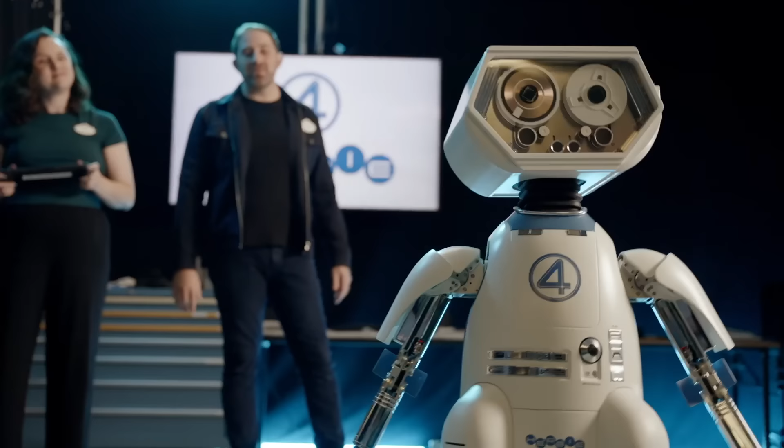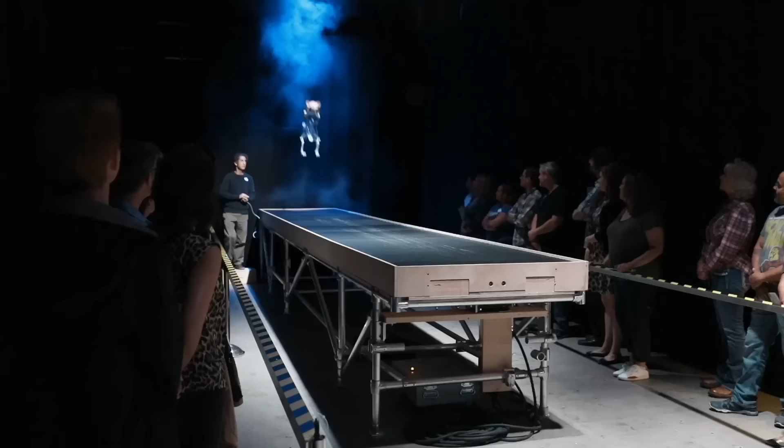In this episode, we're introducing you to a special group in Imagineering, Disney Research. They represent the very beginning of our development process when sparks of imagination begin turning into reality. You'll learn how Imagineers in research and development blend creativity with technology to envision the Disney experiences of tomorrow. You'll also hear how we're collaborating with the world's leading tech companies to push our storytelling in all sorts of innovative new directions. And of course, we'll have a few surprises for you along the way. We call it Imagineering.

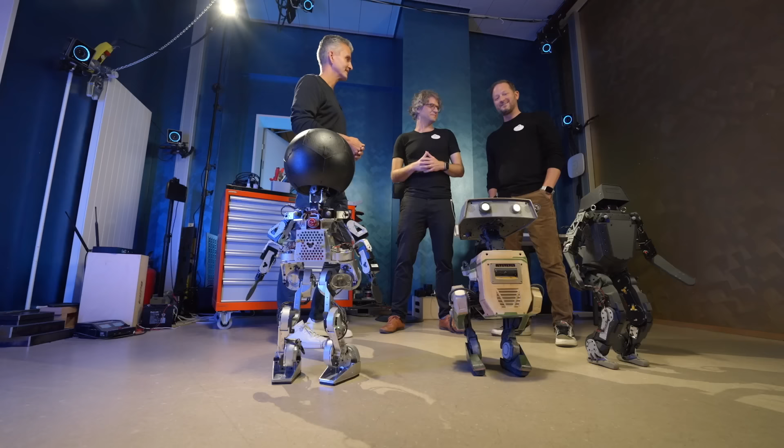Kyle, it's great to be here at the research lab in Switzerland. I've seen so many incredible things. Why are we here? Why in Zurich? Disney's a leader when it comes to entertainment robots. We've got this rich legacy, starting with Lucky the Dinosaur, all the way to Spider-Man and Stuntronics, our BDX Droids.

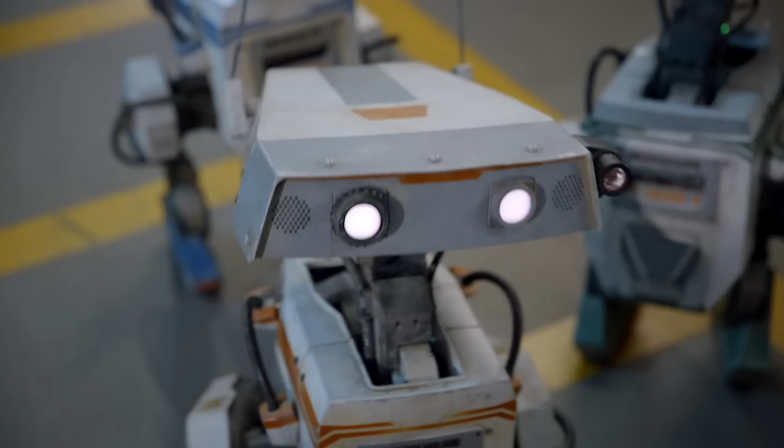Switzerland has become a hub for robotics and AI. At the center of this all is the Swiss Federal Institute of Technology, or ETH Zurich. We partner with ETH, including a shared PhD program. They cover all disciplines from hardware to smart software. This team here is a leader in creating the next generation of robots.

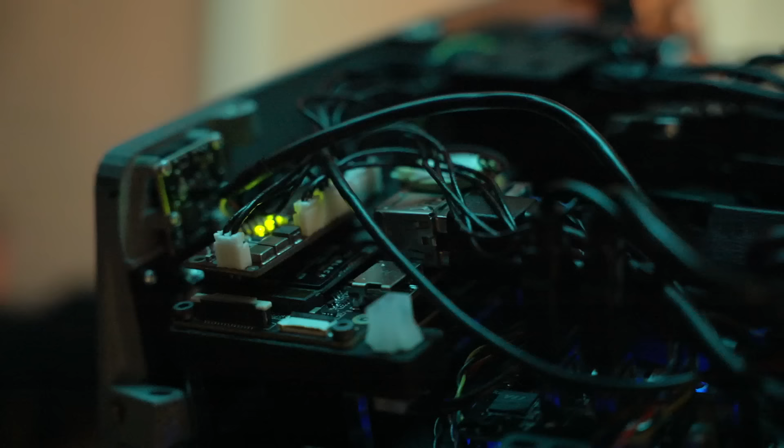We have one unified goal, building artist-centric technology to tell new stories with characters like these ones that we see here and bring them really to life so that they emote and interact with our guests. And it's incredible how far this has all come. It's pretty amazing what's happened in a short amount of time. We got a big surprise for you, Josh. Okay.

Hi, everyone. I'm Olaf. Hey, Olaf. And you are... I'm Josh, Olaf. So good to see you. You look amazing.

Olaf is one of our most popular characters. Absolutely. He shows up in parades, in live entertainment shows, as well as in character meet and greets. So the demand to bring him to our parks is off the charts. We're excited to announce Olaf will be available in both of our Frozen worlds in Hong Kong and Paris early next year.

I can't even imagine this. Like seeing people meet Olaf for the first time in his form. I think this is going to be just incredible. A really, really inspiring day. Hands down, this is the best day of my life.

Hi, Natasha. Welcome to World of Frozen. Hi, Michelle. I am so excited to be here. I'm super excited too. It's so wonderful to see World of Frozen come to life and coming to life in a whole new way. We will have, for the first time in forever, a self-walking Olaf. It's incredible. We're going to have next generation robotics characters, and this is the latest cutting edge technology.

We're here in Glendale, California, at the headquarters for Walt Disney Imagineering in the R&D facility. Yes. We have this huge legacy of building and bringing our characters to life through the latest in technology. I like to think of R&D as the wizard shop inside the wizard shop.

Not only do we have the incredible innovation which happens across the broader Imagineering group, but we actually have dedicated experts. They're really creative technologists here within R&D, fusing together both art and science to bring experiences to life. We've been able to bring that group of people together under one roof to solve some of our biggest challenges.

When you really go back in time, Walt created WED Enterprises to build Disneyland. He didn't have an R&D group. It was a smaller, more nimble thing, but there were specific projects that needed an extra amount of invention. And so he did have to collect people, and I think of Audio-Animatronics as one of those big ones, but also the illusions and things like in the Haunted Mansion. These were really pushing the edge of technology.

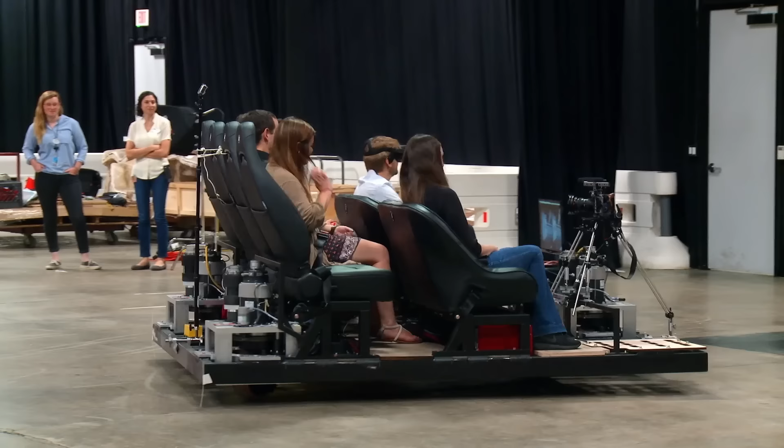When you think about what R&D is today, it really is an extension of the original Imagineers who Walt tasked with innovative ride systems, with Audio-Animatronic figures, things that could allow the guests to step into incredible worlds in ways that couldn't be done if you just had to have actors and other things like this.

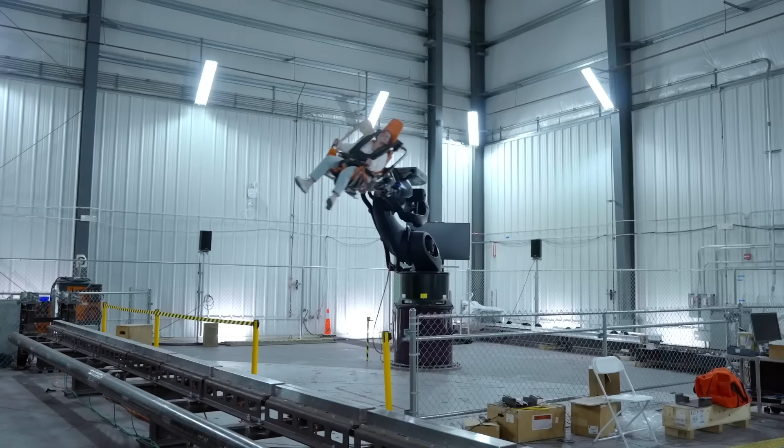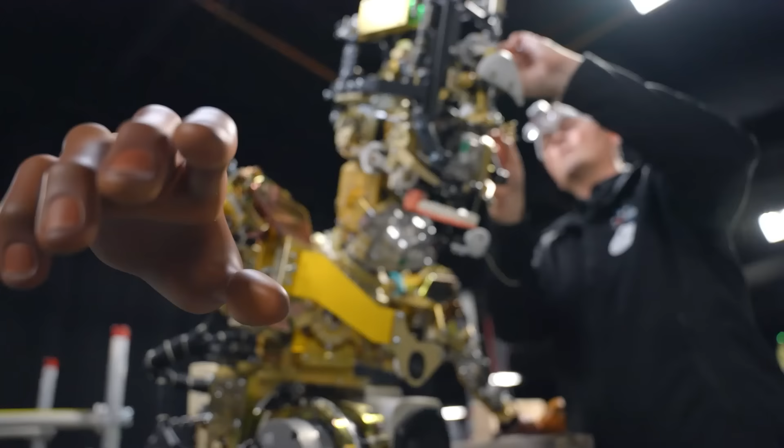And when I joined in 1993, R&D was a top secret facility. Actually, we didn't want anybody to know that we had this innovation going on because it was really the technology behind the magic. Over time, though, we've loosened that up and actually do shows like this where we expose it because it's become more and more important for the company to be seen as the innovative and technology-driven company that it is.

The diversity of the work that we get to put some of these talented people against, it's kind of fun doing the impossible, and that's what the challenge is every day. Everyone has their own unique approach trying to get that done, and that's what's great about the job is that it's different almost every single day.

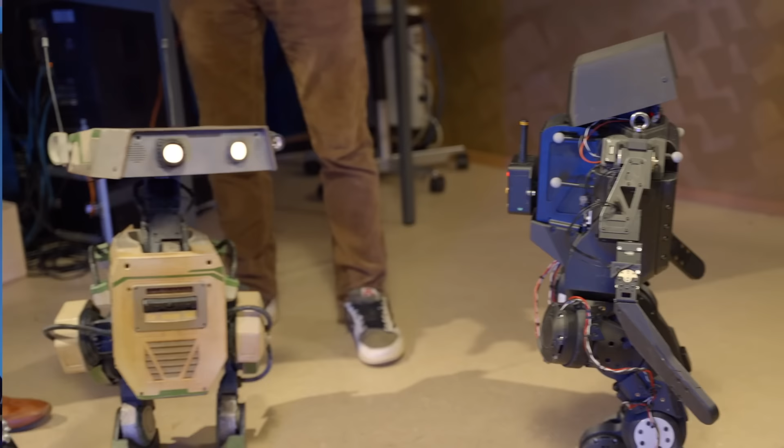We've got some robots, some droids in front of us. We started from very basic structures with a huge ambition, ultimately, to get that state you're talking about, and now here they are. Talk to us about the progression. Yeah, we actually started with this humanoid test character. Can we get 2 legs to do stylized walking? We have characters that express emotion through motion. So stylization is important, artistic interfaces are important, and we embrace reinforcement learning as a technology very early on.

Reinforcement learning is the way we learn actually as humans. That's an algorithm that brings this capability to a computer. And so we train them to imitate artist-provided motion. They learn to balance at the same time. Do they actually learn? They do learn and imitate basically how we humans learn. And over time, really polished motions.

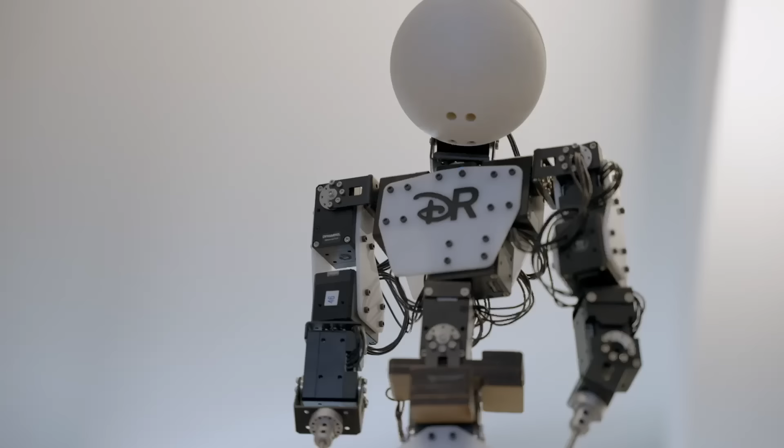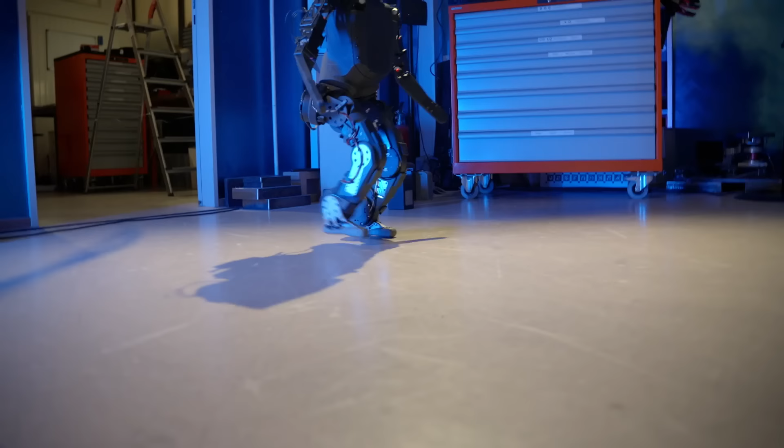One of the things I think is really interesting is the use of machine learning and AI in order to develop the robotics. Reinforcement learning is a branch of artificial intelligence, which allows us to take animated figures, bring them into simulation, and then teach them how to walk as if they were a young baby. We can do 10,000 hours worth of training in days. It used to take us years to develop robots. Now, using reinforcement learning, we're able to bring those robots to life in mere months.

Espen, do you remember how I challenged you to create actually a first walking character with 3D printed parts and off-the-shelf actuators? So you said, can we build a walking robot? And I said, well, I think it'll work, but I don't know. And you said, well, let's do it anyway. If we can use 3D printing, we can build something really fast. Can we make that work?

Key idea was, instead of trying to build a perfect, idealized system, let's build an imperfect system and instead try and understand it really well in software. We first took a single actuator and we put it on a test stand and we tried to understand how this thing behaved and moved. Now, when we put it together, we tried it and the RL walking worked first time. Yeah. Never happens. It's a solid foundation that we've then been able to really build on.

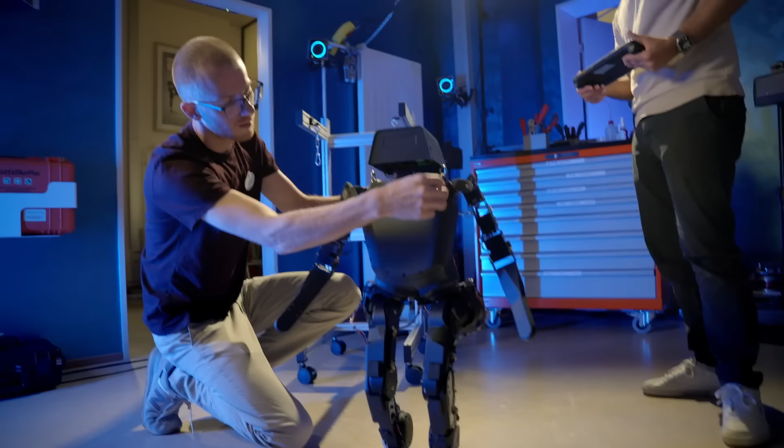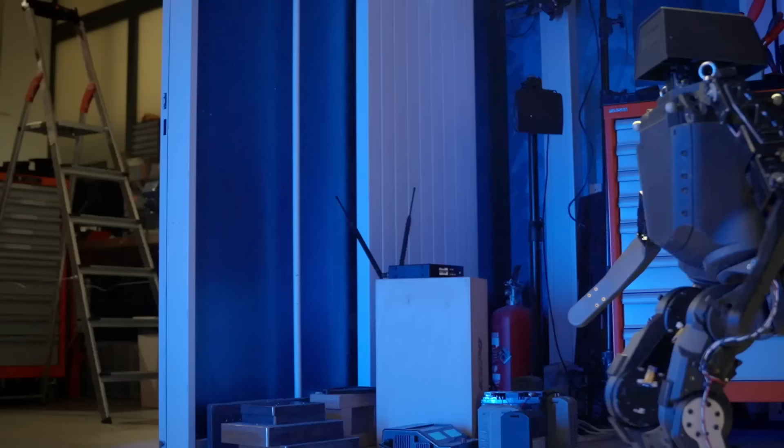So this guy doesn't look anything like a BDX droid, but if you really look under the hood and look at what makes this work, it's all building on the same technology, and so this is really what enabled us to then go and build the BDX droids. We know how humans walk, and so the goal was then, how can we bring this human motion to our robots to make them feel lifelike, and we want to have those robots also perform other motions. So our goal was not to have the robot learn only a single motion from an animator, but be able to perform any motion that an animator asks the robot to do.

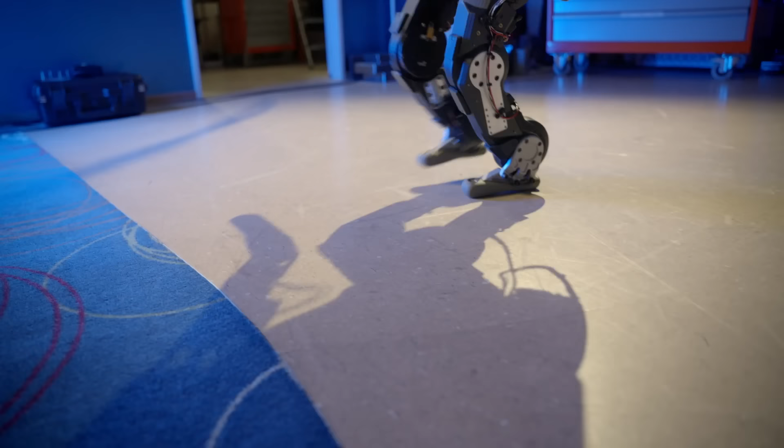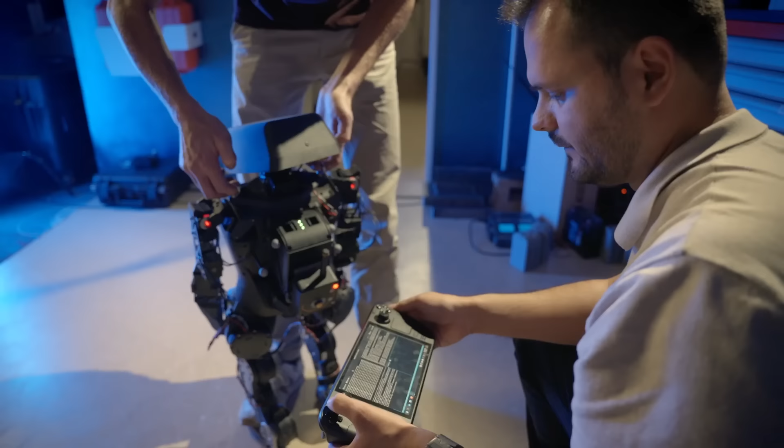From the human motion, we first have to retarget them to the morphology that we have here. This character is a bit smaller and you get a lot of imperfection, but then in reinforcement learning, it still is able to learn from this imperfect data, and it extracts basically the knowledge of how does a motion evolve over time and how can I track such a motion. And so it's the same concept again. RL, reinforcement learning, learns in simulation to imitate those motions many, many times. Over time, the robots become better in doing exactly those motions that we ask them to do.

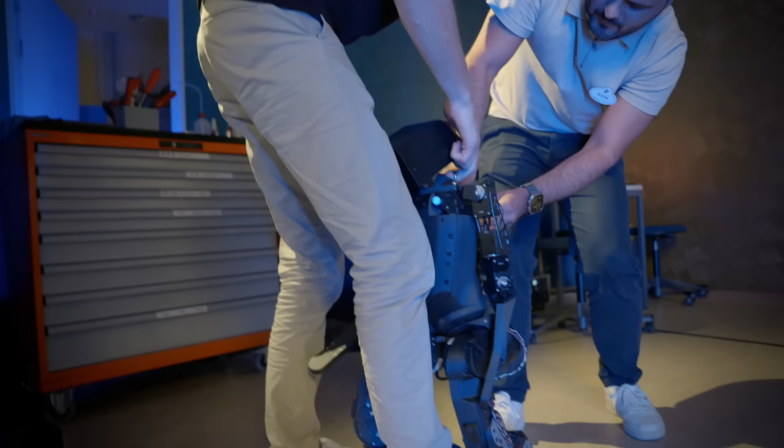Getting something to work in simulation is one thing. Getting it to work on robot hardware is a different challenge. The physical world, the real world is unforgiving. The robot will break if it falls too many times. Because we took the time to understand how the actuators move, to tune the models, that means that you can really start pushing those motions to the limit.

And then we got it to moonwalk. One motion that is very challenging is something like a moonwalk. You slip over the floor, basically, and move backwards while pretending to move forward.

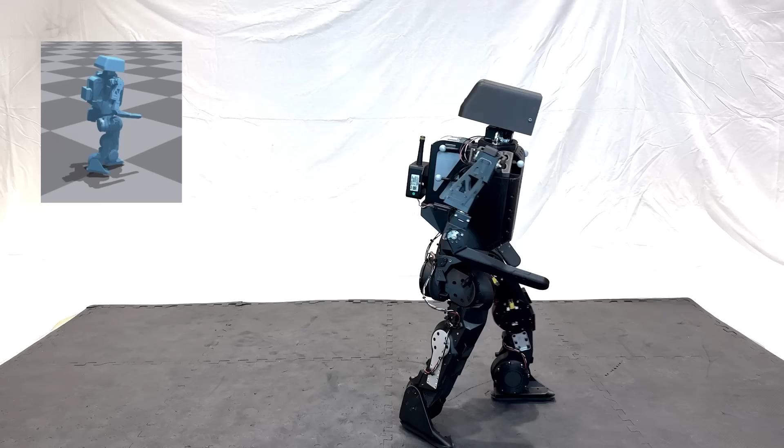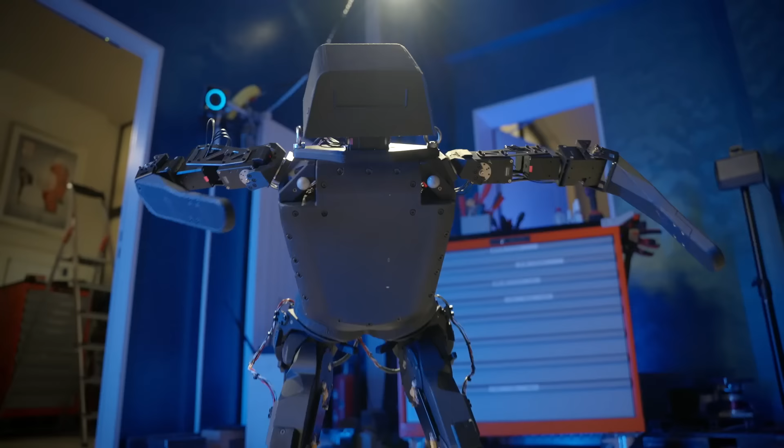We used human examples of a moonwalk and then trained a policy that can actually do the same on the robot. You create artistically a target motion and you can stream that to the robot and it dynamically balances afterwards. That's amazing for taking the next steps. We made great progress in this direction, but there's much more that we can explore and dream of.

First of all, thank you for having me at NVIDIA. Welcome to the second happiest place on earth. It feels that way. I think our collaboration is essential. We're in love with working with Disney.

The work that we work on together covers computer graphics, artificial intelligence, robotics, and the fusion of all of that. Disney has been at the forefront of some of the most cool technology invented. But at the core, the reason why we love the work is just the way you push the technology is incredible. A lot of great technology started in entertainment. Yeah. The best technology in the world has always been core to enabling Disney to bring the characters to life and immersing our guests in incredible experiences. You know, at the core, Disney is a technology company.

The joy is so incredible that we forget about the technology, and that's exactly the point. We had an expression, the technology behind the magic, because at the end of the day, we want people to believe Olaf's alive. It's not very cool for us to brag about our tech. There are certain characters, like the BDX Droids, where you can't put a human in a costume. They have to be in this mechanical form, and yet they can still be imbued with life.

My dream, and it will be a reality, is that it's a seamless experience for our guests. If they love us and they experience us in the gaming world, they can bring that with them to the physical world. That's right. They'll experience it when they see the films and streaming, and then what they do in our parks can also be referred back to. A lot of the work that you do inspires whole generations of engineers. You know, what Imagineering is about to put out. In fact, that's always the thing we look for.

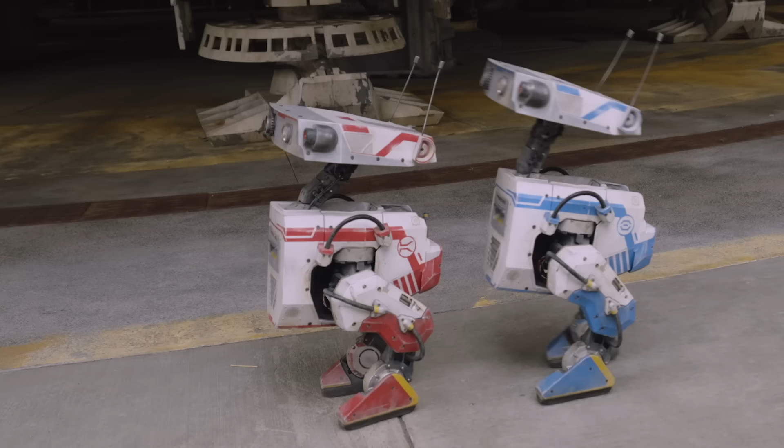There is a tremendous amount of talent out there focused on very specific problems, like NVIDIA, where they are building some of the most revolutionary computer chips that are going into our robots. And what that then allows us to focus on is that emotion, that connection that we are making with our guests. We're taking motor encoder data from the BDX joints and then playing it back so that they can get an authentic droid-like sound. We couldn't focus on that if we were having to build our own silicon and our own chips in order to bring those robots to life. So NVIDIA has been a great partner to help us do that work on the physical products, but also in simulation.

We're really excited to upgrade the Millennium Falcon with an all-new mission to bring to life the characters, the Mandalorian and Grogu. There are a couple technical dimensions that really help our guests get lost in the story. Every single cockpit is driven by graphics cards, all working in parallel. All of that media is being rendered in real time, giving us flexibility for future upgrades. We have access to the most amazing engineering teams, as well as graphics drivers, to make sure that we're delivering high-quality media to truly transport our guests to that galaxy far, far away.

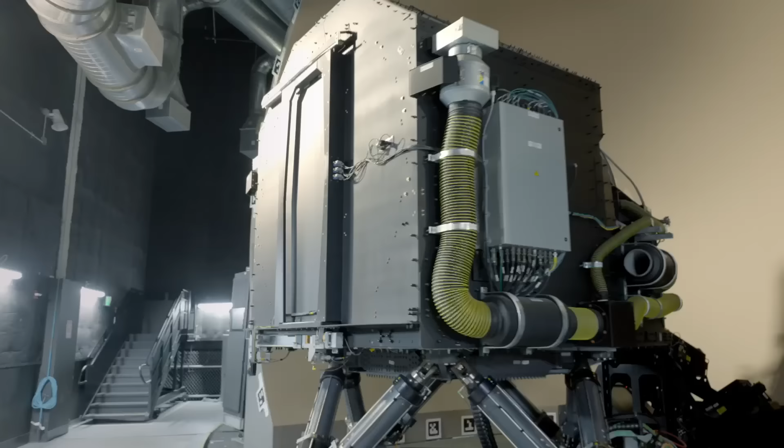In addition to an all-new story, we also went back and looked at each of the individual roles, the pilots, the gunners, and the engineers, and looked for opportunities to further enhance the gameplay. Millennium Falcon Smugglers Run is powered by Unreal Engine. Every single one of our cockpits has 5 projectors that are all tiled together. And so we've had to work very closely with the engineering teams at Epic Games to make sure that the effects that you would get on a single screen at home can work across multiple monitors.

The Mandalorian leverages a lot of 3D models. They actually play them back in real time on set. We were able to take those Unreal models directly from production and bring them into our version of Unreal for the attraction. So instead of having to create all of those assets from scratch, we were essentially able to go shopping from this library of existing assets, which allows us to not only bring the story to life much faster than ever before, but also guarantee that it's 100% authentic because it's exactly the same asset that you'd see on screen. It's all about allowing our guests to step into that story world.

Smugglers Run, a brand new experience, the latest in hardware processing from NVIDIA, and our partnership with Epic Games. It will actually be better quality. Real time. So that the interactivity and agency of the guests can actually be greatly improved, but include scenes, characters, places that will come out with this new movie. And we're delivering it in Florida and Anaheim at the same time.

When you work so hard on technology and so many of the applications are either invisible or mundane, being part of something that creates these incredible relationships and emotions around the world is also fun for those companies as well.

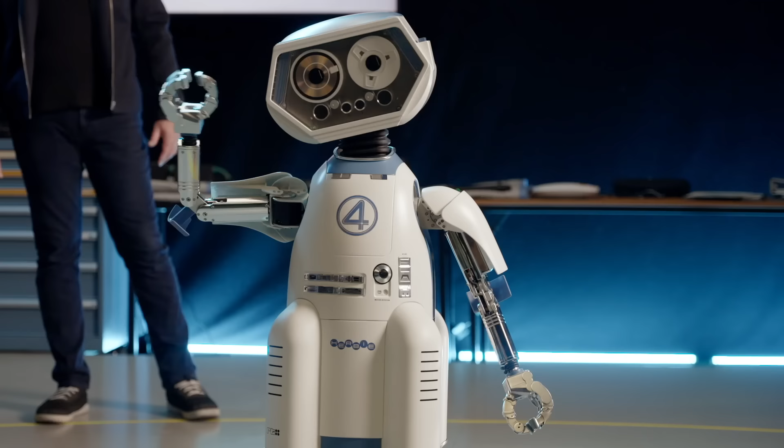We're here at Walt Disney Imagineering in our top secret lab, and this is H.E.R.B.I.E. Even though H.E.R.B.I.E. is technically a robot, he's a member of the Fantastic Four family. We want that emotion and that personality to come across in everything he does.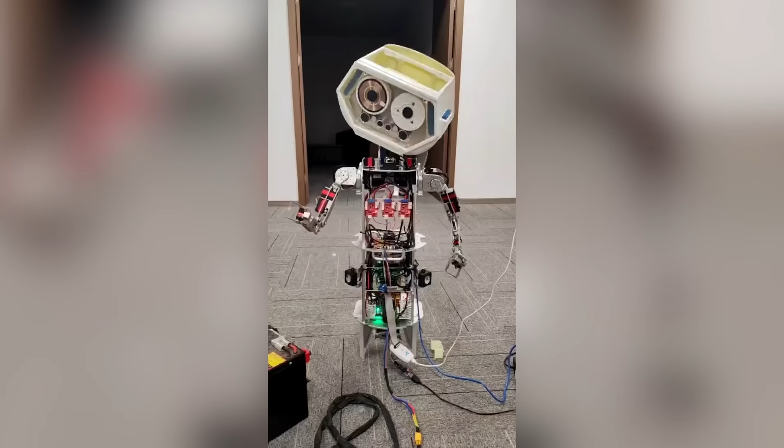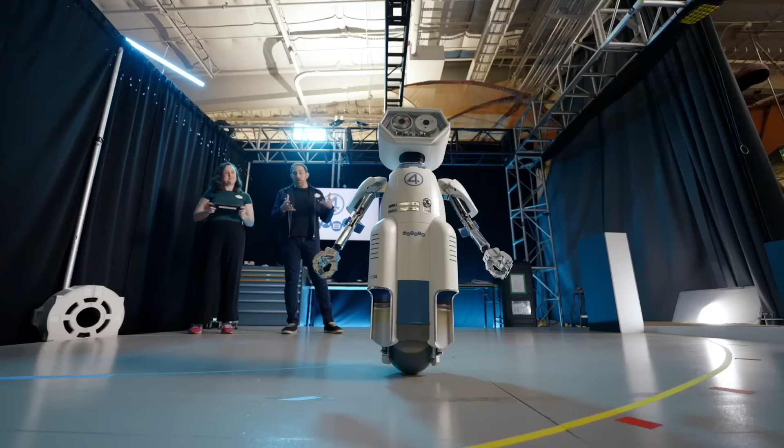For H.E.R.B.I, we were able to bring him from an idea to a reality in just a short 3 months. And that required Imagineering, but also our live entertainment group, artists, engineers, designers, scientists, character performers, all working together to bring this character to life. But in the film, the prop they used on set didn't actively balance. So we had to create a robot that could be in front of our guests that came to life like a character while actively balancing.

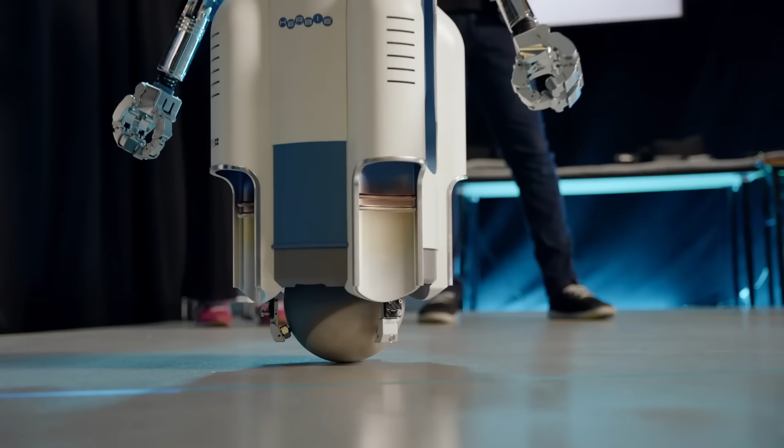Inside H.E.R.B.I are a variety of sensors that measure his angle, position, and speed. And 250 times per second, it's checking those sensors and constantly micro-adjusting that ball to keep him upright, and continue balancing even when we play back fun animations. Moving his arms that much and outstretching them really changes the center of the mass of the character. Being able to constantly adjust and still keep alive and play those animations really is a pretty cool technical feat.

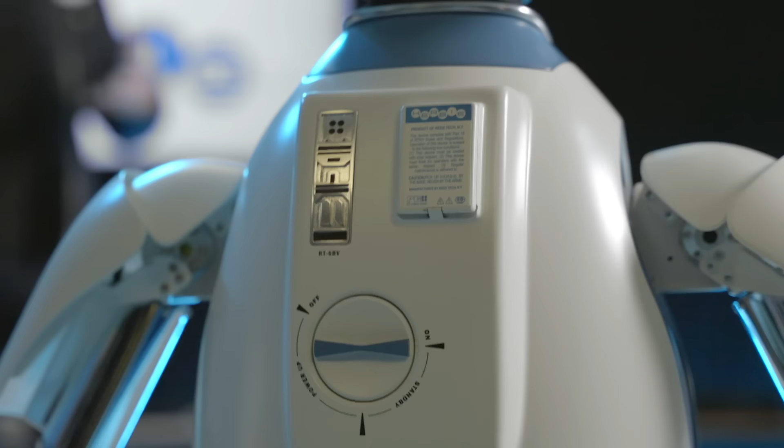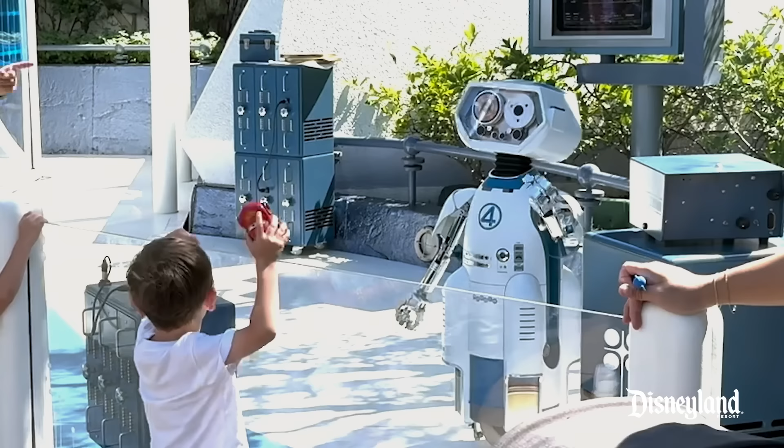What I love about H.E.R.B.I is he's got so many little details and Easter eggs, whether it's those Reed Tech decal labels or the part numbers that are references to the cinematic universe, even his really expressive tape reel face. Every detail of this was lovingly crafted with the filmmakers to bring H.E.R.B.I to life. Our guests just loved talking to H.E.R.B.I, interacting with H.E.R.B.I, and we are so excited that we were able to bring him to life at Disneyland Park in Tomorrowland. Nice job, H.E.R.B.I.

More and more, we want to be able to deliver these characters in their actual form that you see them in films and on TV or streaming faster into the parks. With our most recent robot, H.E.R.B.I, which we brought day and date with the Fantastic Four movie rollout, we went from concept to design and in the park in months.

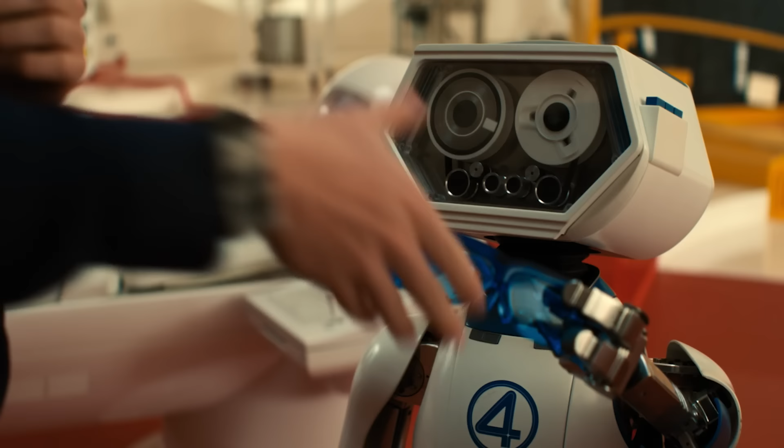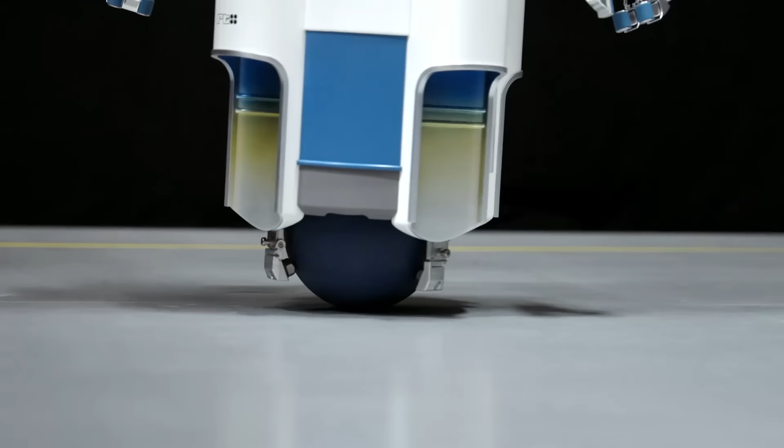Yes. I remember we were at Pinewood Studios, and when we met with Matt, the director, he actually told us he redesigned H.E.R.B.I to not just be hovering constantly, but to be on a ball balancing so it could go to Disneyland. The minute we heard that, we of course had to say, do it. We got to do it. All that wish fulfillment that any of our guests see on the screen now can be a physical experience with our guests. And the actual animators who animate the films can actually help animate these figures, which was not the case in the past. Is there a favorite project that you've seen in R&D that really gets you excited about the potential and what we've done in the past?

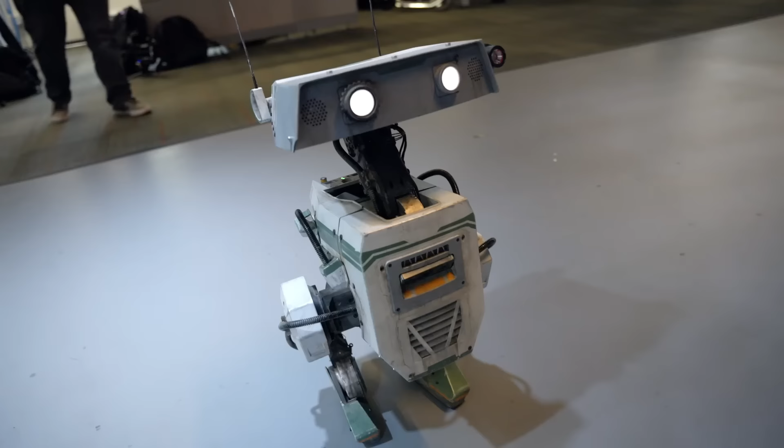I have to say, I am a fan of BDX Droids because I think that's just a great story of how what was created here as a prototype has ended up in the movie. When Jon Favreau saw them, he's like, I have to put them into the Mandalorian and Grogu movie. So we got 2 legs walking the first time we tried this on hardware. And then this inspired us to do a true character, a Star Wars droid that can really express emotions. And if you look at their legs, they actually resemble one another. There is some similarity there.

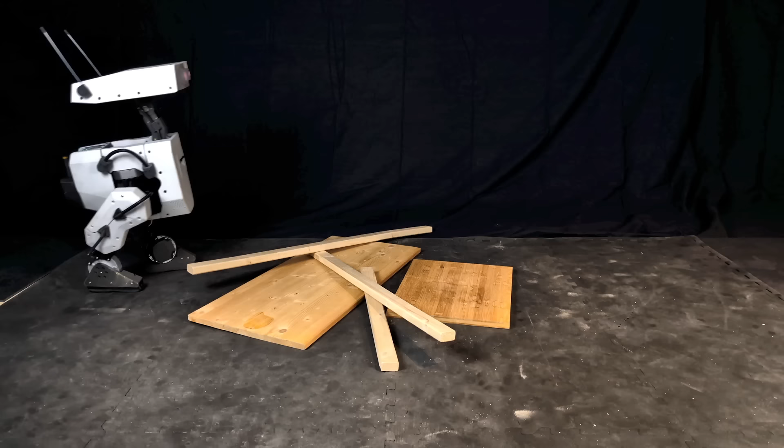Well, I can remember this walking through research and development in Glendale. I saw one of these. It was a prototype at the time, and I couldn't believe what I saw, the character that was coming out of the droids. You've all done incredible things in a relatively short amount of time.

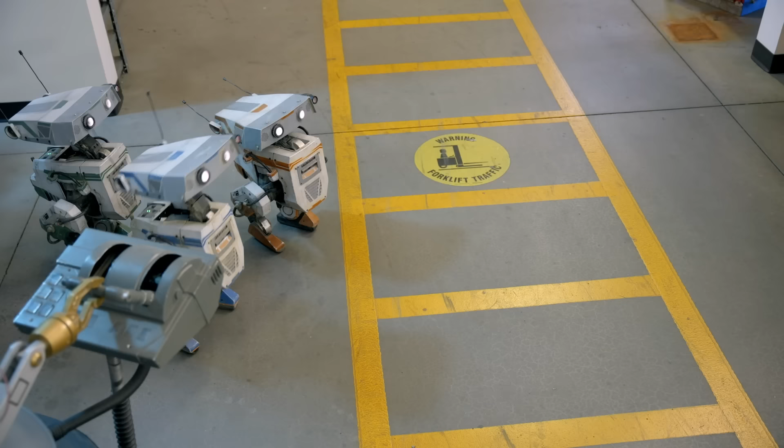It took us less than a year to go from concept to 3 droids that we brought to the park for the first time. We actually brought spatial AI. We put cameras into these robots so they can actually see as a means to understand their environment, including our guests. And obviously, guests in our parks, we want to have very meaningful interactions.

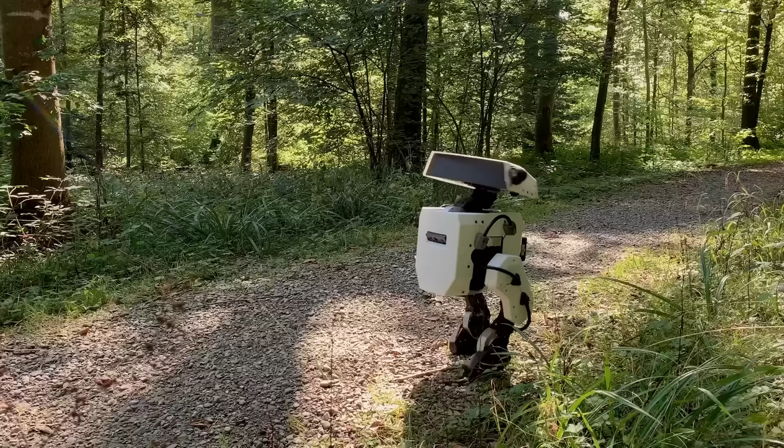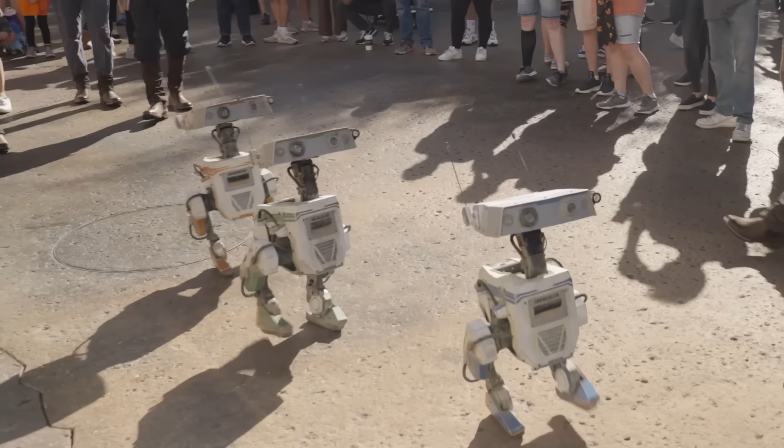One important item with the BDX Droids is to bring more autonomy to these characters in general. First step for more autonomous solutions is to give them eyes and ears, understanding the environment and including obviously our guests. So we have these 2 cameras on the robot that are giving video feed to the robot and it is using that to understand its surroundings.

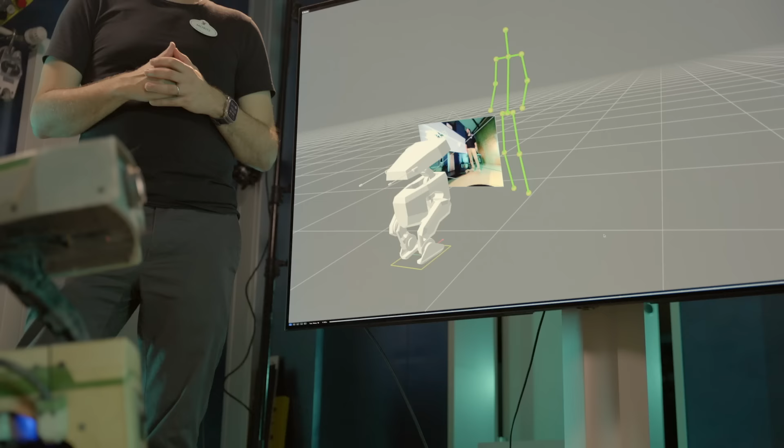Here we see what the robot is seeing. So we have a camera feed that shows the image that the robot is capturing right now. And then here is the understanding part. The robot is able to extract from the image a representation of me moving my arms and moving my legs and anything I do. The robot is understanding my movement.

If a guest comes in and leans towards the robot, it can see that. And if he comes back up, you can also see that. You can also see if I'm raising my hand, for example, to wave. Oh, that's incredibly useful. So we could basically learn from what you see what the robot is actually supposed to do. Bring more autonomy to these characters. That's really exciting, I think. Thanks, BDX.

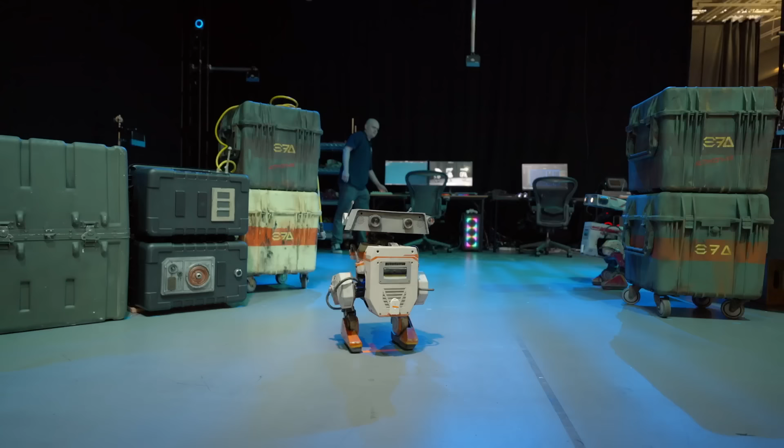We're here talking a little bit about our BDX droids, and we want to turn our lands into stages where the droids can perform continuously for all of our guests and meet as many people as possible. These droids are so physical. You need to see how they actually work in the physical space, but also work with each other.

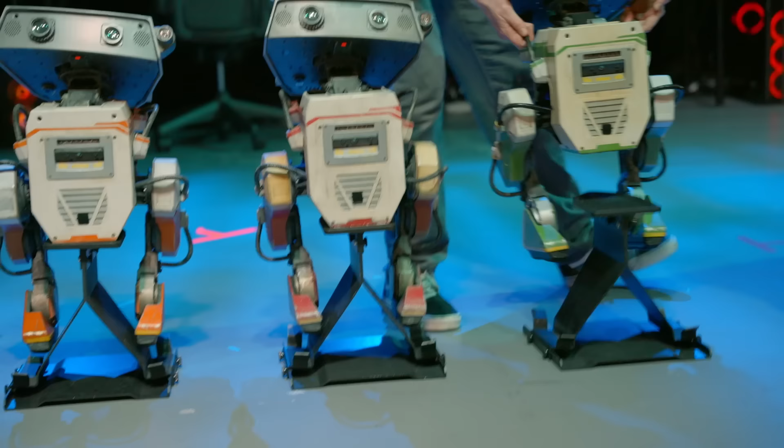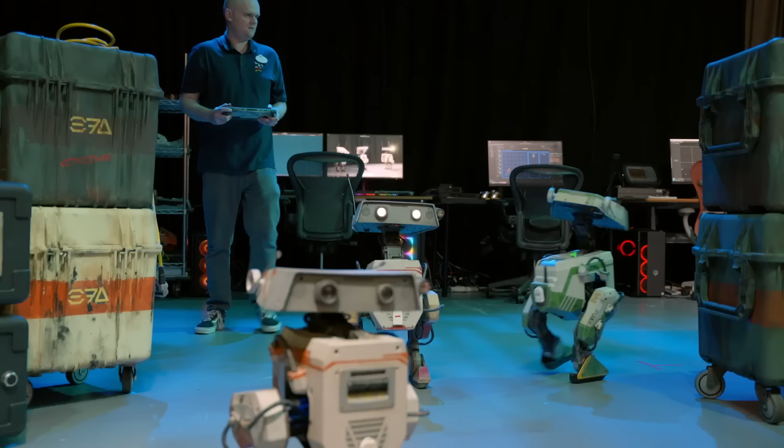What we have here is our droid recording studio, the place that allows us to test and iterate with our creative developers and our shows that can be played back live in front of our guests. We can bridge this gap from core robotics to live entertainment. Ryan, the creative director here, has his script, and we're going to run through this. He's going to give us feedback so he can make the show how he wants.

What's really cool about these moments with the droids in the studio is that we can work out sight lines, work out timing. We can figure out exactly what kind of show we want to deliver to our guests. Awesome. That looks good. Yeah. Okay, perfect.

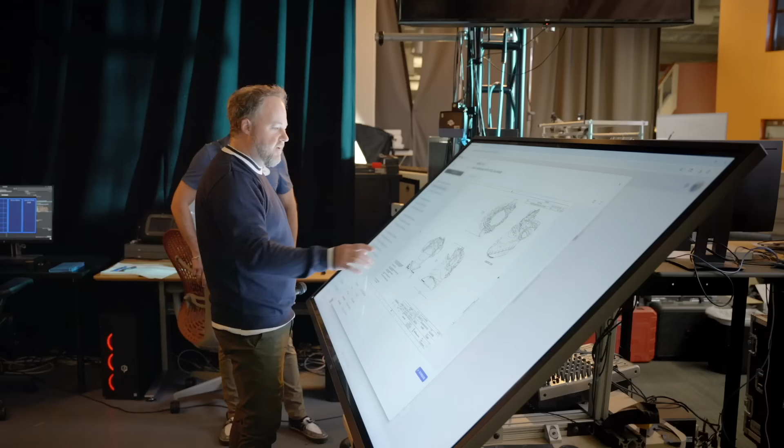One of the projects that I'm very excited about we initiated together is our own J.A.R.V.I.S., J.A.R.V.I.S. being, of course, Tony Stark's AI co-pilot. J.A.R.V.I.S. is primarily an internal tool, and really this is the AI ecosystem for Imagineering. We're giving all of our Imagineers the ability to tap into the collective intelligence of all of Imagineering. We have 70 years of data that we have used to create the greatest attractions in the world.

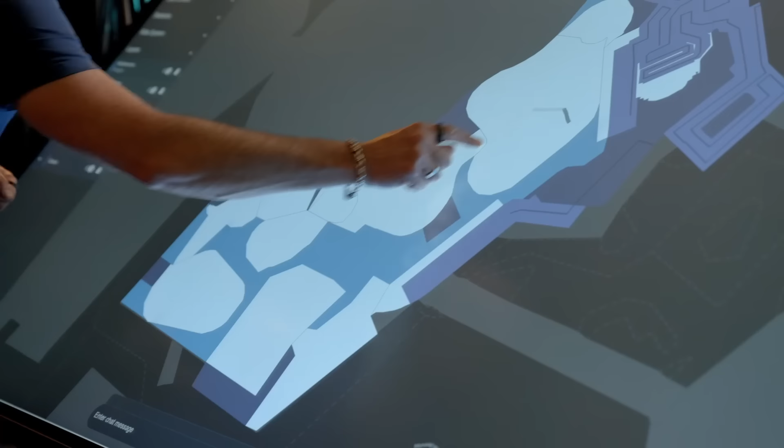J.A.R.V.I.S. was our first opportunity to take and digitize all of that data and be able to give it to an Imagineer at their fingertips so that they could move more quickly. And we've got so many talented Imagineers with all kinds of different backgrounds, and the ability now for them to take advantage of a tool like J.A.R.V.I.S. is only going to continue to improve their superpowers and bring those experiences to life faster.

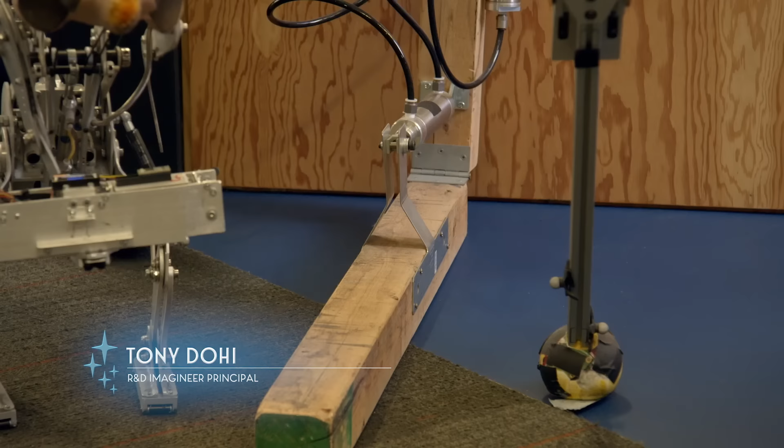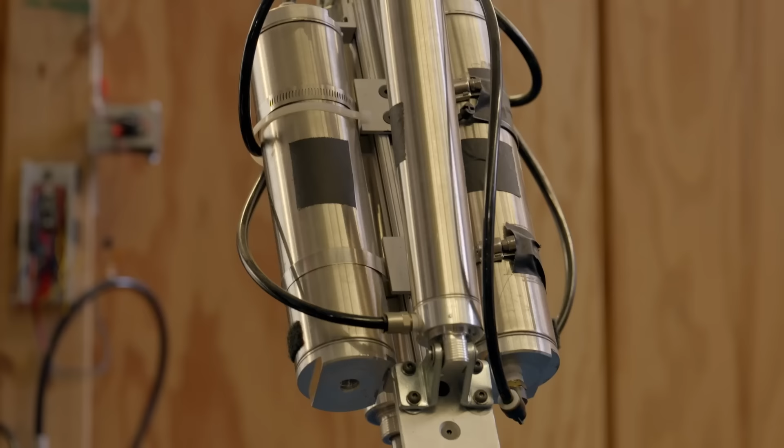This is the lineage of prototypes that got us to Spider-Man. Over here is the log, the really simple robot, a microcontroller up here, 1 degree of freedom. This pneumatic cylinder controls it. We were able to prove with this, we can take something that's roughly the size of a person and control its rate of spin in the air and how it lands. From this, we went to a stickman, a system that was more precision focused. We also made sure that we can throw this over and over and over again.

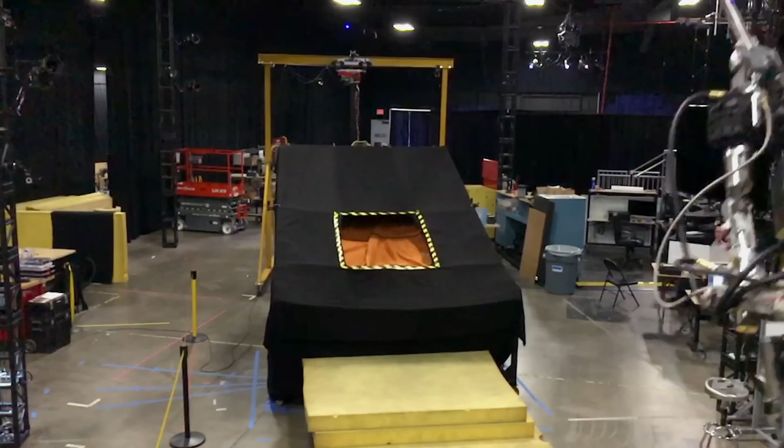From 2 degrees of freedom, we came up with a robot that's human size. When you see this move through the air and spin and then drop into a net, I think we can actually do a Spider-Man character. But it also weighs about 150 pounds. Let's go with something smaller, and that's where the idea of Mini-Man came in. Mini-Man is precision machinery, all electric, sensors on board, computer on board. We can animate him to move like Spider-Man would.

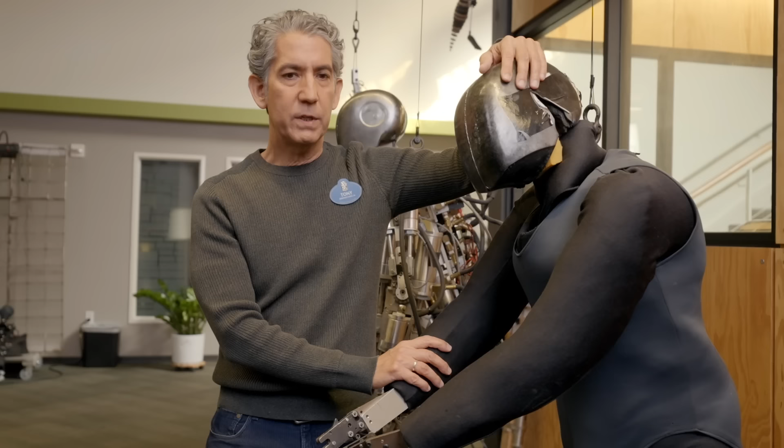Let's see if what we are learning with a half-scale model actually translates to a full-size character. This robot, we thought we'd go with something that had the precision of Mini-Man, but now in full scale. And this is the culmination of our series of prototypes. We call it the Mark II. This figure is human size, about 5'9", 95 to 100 pounds, made from 3D printed plastic, aluminum pieces where we need extra strength. We were able to emulate the different types of movements Spider-Man did in the movies. So that's Spider-Man in a nutshell, or in a web.

We started with Lucky the Dinosaur, and we've gone through the Muppet Mobile Lab, even to some of our most advanced robots like Stuntronics in Avengers Campus. Spider-Man. It's been an incredible evolution, and now we're bringing even more characters to life.

It's great you brought up Lucky the Dinosaur. It was the first all-electric actuated animatronic. The reason we did that is we wanted to free the audio-animatronic robot from the floor and be able to walk and roam through the parks. And to do that, we tried hydraulics. It was way too noisy. We went electric. At the time, it was challenging because actuators really weren't meant to do what they did, but we figured it out. Lucky really was the start of this idea that guests can interact with these incredible characters.

We are looking here at the humanoid character that we recently built. Can you say a few words what we've been able to achieve with this character? With this character, we really try to push the limits of what we can do with this kind of robot. So in this case, you'll see that she can do a pirouette. A big challenge there is that the foot basically needs to slide while doing the pirouette.

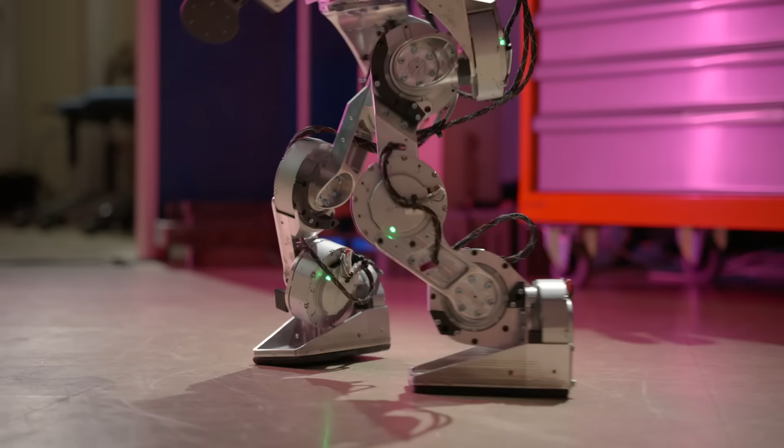If you wanted to get such performances at the limits of hardware to such characters, what's important for achieving that goal? These robots, they learn how to do all their moves with reinforcement learning, and that happens in simulation. So basically what you need is a good simulator to be able to achieve these behaviors. So we recently joined forces with NVIDIA and Google DeepMind to build a simulation framework called Newton. This has enabled us to create a simulator called Kamino. And so what is that simulator and what can it do for us in the future?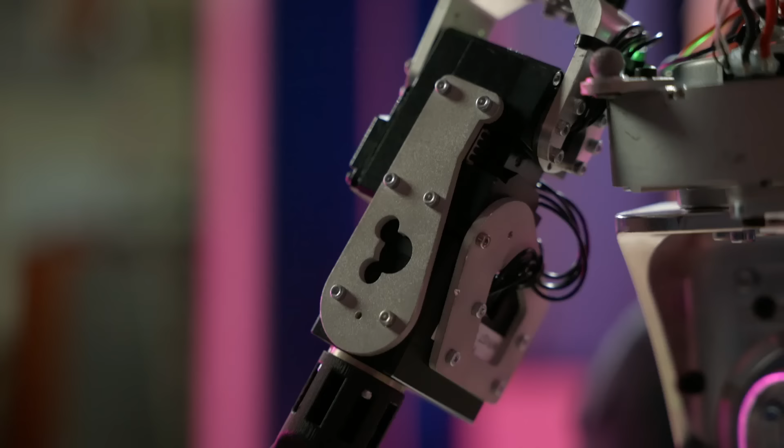The goal there is really to extend the simulator to all kinds of systems, basically being able to model any kind of mechanism with closed kinematic loops. This robot, as you see, has all his motors directly at the joint, but for animatronics, often there's no space at the joint, so they'll have to remotely actuate the joint through some linkages, and these are quite challenging to simulate accurately. That's why our robot has about 10 years of practice in simulation.

Within the reinforcement learning framework, we ask, please stay as close as possible to this reference motion. The end product of reinforcement learning is a neural network that you put on the robot. Basically, this neural network takes in the current state of the robot and it decides what the next action is. It knows if I'm almost falling over, it will take a step to correct its balance. This is very exciting. That opens up a lot of new opportunities when it comes to next generation characters.

We are in the mock-up space of Walt Disney Imagineering Research and Development, figuring out how we combine real-time front projection with a mechanical head. And this front projection is actually being done with just a purely static shell. There is no movement inside the face, yet we're still able to get that very rich micro expression through that front projection. The texturing that we can get by using front projection is really incredible.

The detailing on the skin, we can play around with shaders. We can change the material properties. We can do transformations that we've never been able to do before. Now, what if it was basically a little more battle-scarred, a little more hardened, and he gets cut right across the face? So much of this innovation is how we make these characters as realistic as they can so that they convey the emotion that they're feeling to the guests so that we can all be in that story together and have it be real. Absolutely.

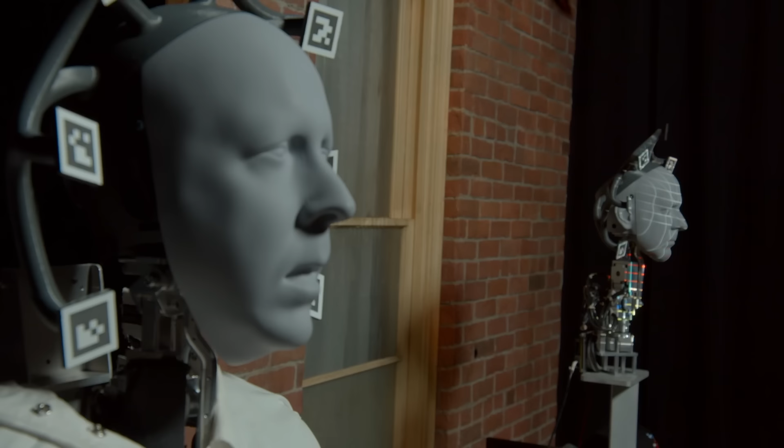This is a crown that we use for projector calibration. These AR markers are picked up by calibration cameras. They translate those markers in the physical world to the same positions in the digital world, matching them perfectly. The software we're using to calibrate this figure is software that we've developed right here in Walt Disney Imagineering. It's the same software that's used in the Millennium Falcon attraction. We want to make sure that that registration is absolutely perfect, and that crown helps us get that done.

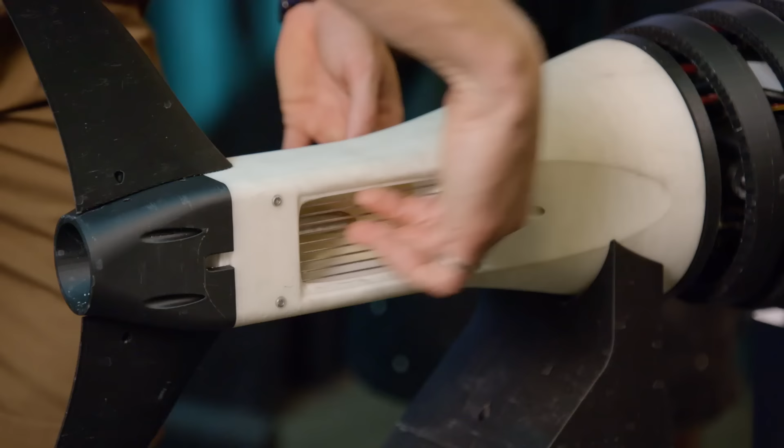That first prototype, we learned some cool data. We applied it to our next prototype. We use the exact technology, but on a dolphin. The ailerons are now the fins. This jet pump is a slightly bigger one, so we have the grate, shoots out the back. We're applying some biomimicry here, literally how dolphins move through space.

They're constantly making this sine wave. We're using two servos. If they work together, you get side motion. If they work opposite, you get the up and down. Some really natural, organic movement in the center. Now this starts to feel alive.

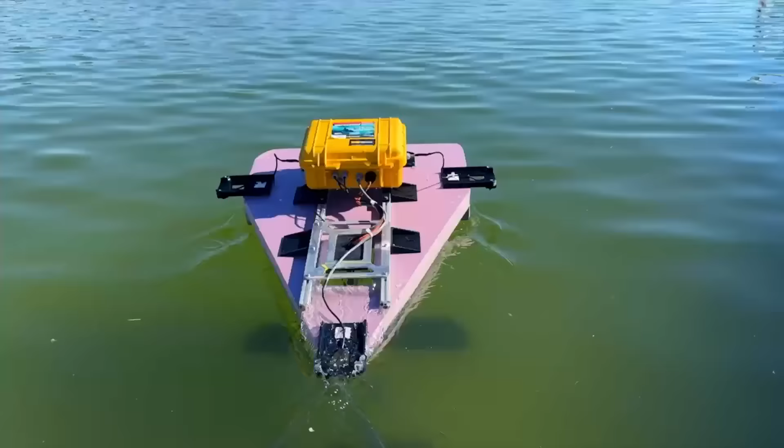Out of our dolphin prototype phase, we tried something different here with this hydrofoil. If you look at how this thing works, this pink foam piece would be a character of sorts. The GPS, IMUs in that box to control and be able to do autonomous shows. The tech underneath is basically the hydrofoil technology. Once again, a plane. A literal plane.

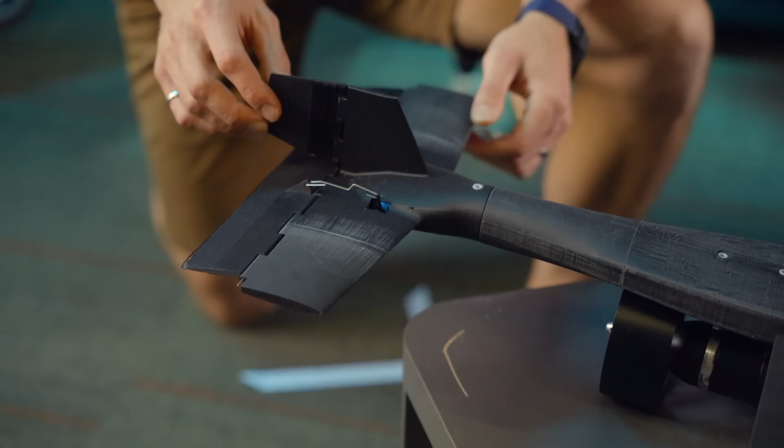Similarly, we have ailerons controlled by servos, an elevator that does the pitch up and down. We have a rudder that's like kind of the steering tail and a thruster to go forward in propulsion. With our GPS and our IMU, now we're getting that space of autonomy. The ship balances itself and then can drive and follow trajectories.

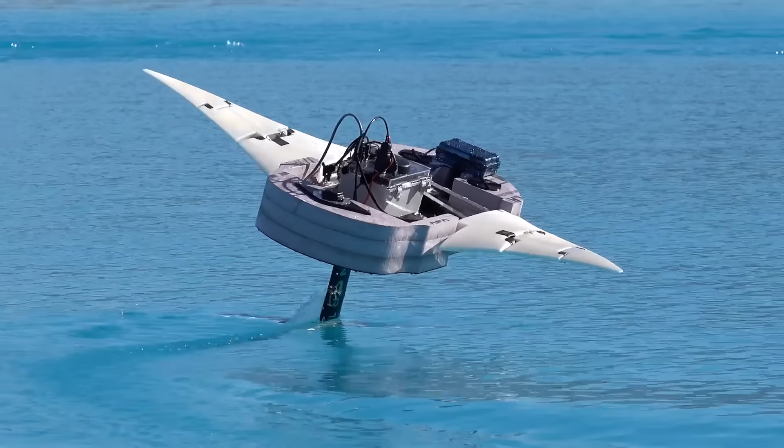So it knows, oh, I'm leaning this way, and then we have controllers to move the ailerons, lean left and turn to get back to my trajectories. And then the second level is the positioning of it all. We use a GPS and also ultrasonic sensors to know how high above the water you are.

Now that we've got the tech in a good place, we're creatively trying to see how far we can take it, how far we can push it, and how to tell a really compelling story with whatever character we're developing for it.

We have a really wonderful partnership with Meta to leverage their Ray-Ban smart glasses for both guest-facing applications and also behind-the-scenes design applications as well. What's great about these glasses is they've got cameras in them, microphones, speakers. For our guests, it allows us to put a virtual theme park guide in their ear.

The glasses can enhance the ways we tell stories for our guests, unlocking a world of information about the land that they're in. Just by looking around, I can ask questions about some of the architectural details, and I get the answer right in my ear. Maybe I want to learn a little bit more about a merchandise item for my child. All I have to do is look at it, ask, tell me more information about it. And then right in my ear, I get all of the product information.

One of the more fun but intimidating moments of my job is when we do a big greenfield site, which means nothing's on it, we've cleared it, and you have to go there and start picturing what is it going to be like when you build this thing. And to be able to go and actually have a pair of glasses where you could walk around and get an early previs on the site where this thing's going to be is pretty incredible.

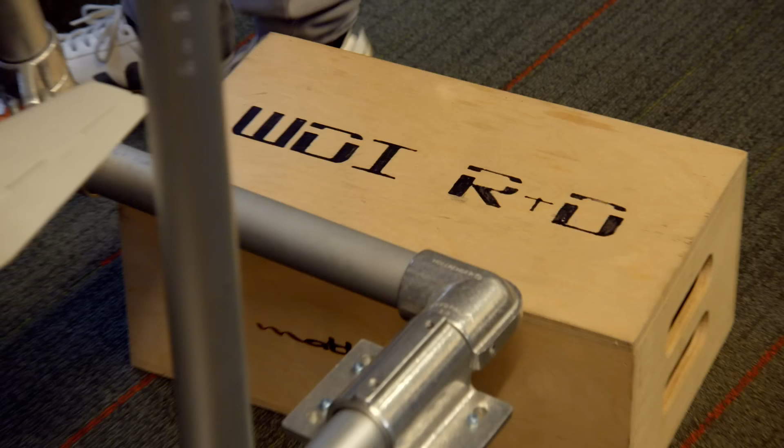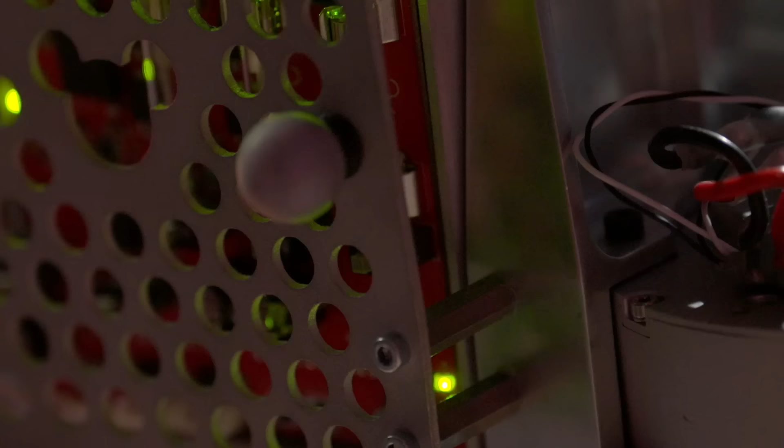We're not just using technology for technology's sake. We're using it in service of that story that we're really going for. If we're doing our jobs properly, all of the technology goes away and our guests get immersed in the story that we're trying to tell. The ability to dream up something that might seem completely crazy and watch it come to life is really exciting. So much of this innovation is about how we make characters convey emotion to the guests.

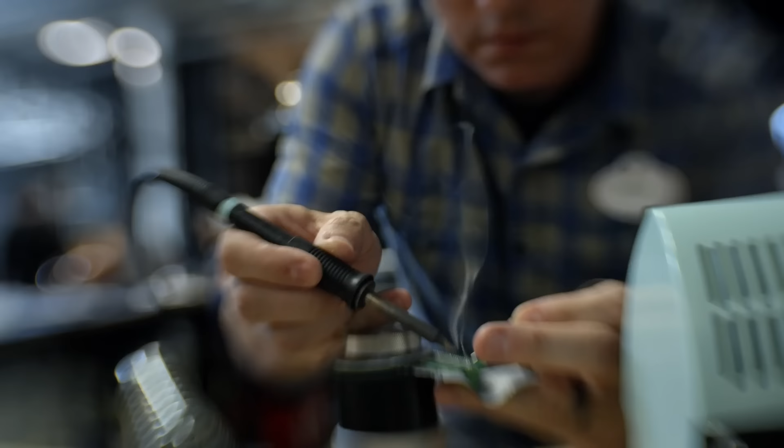The thing that keeps me motivated, that family to step aboard the Millennium Falcon, that experience that they'll carry with them for the rest of their lives. Our vision is to have robots being able to interact with our guests. It's this team that's been leading the charge to try and make that reality. I could feel that passion walking the hallways. We're as much magicians as we are PhDs and scientists.

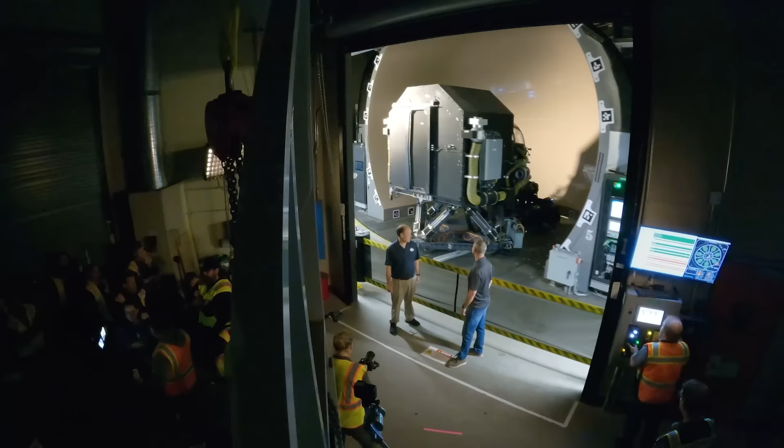And trying to surprise our guests each and every day. If we're not failing, we're not really pushing the boundaries. Finding that sweet spot so that we're always doing just what's needed but no more is really key to what R&D brings. Curiosity keeps leading us down new paths. We call it Imagineering.